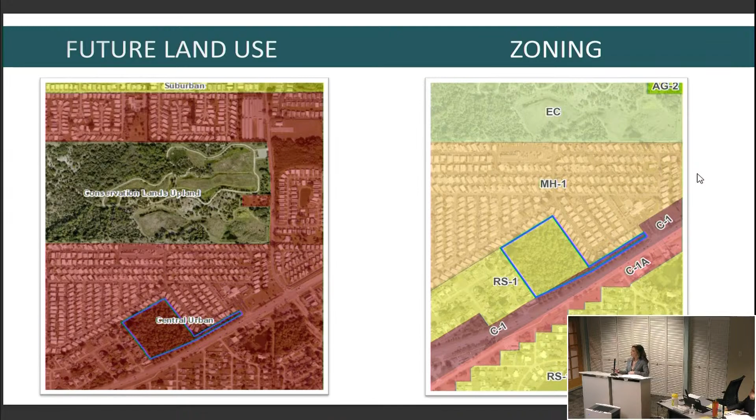From the zoning standpoint, you can see we are largely RS1 zoning. The strip along Bayshore Road that I refer to as the flag lot portion is C1 zoning. Our surrounding zoning districts include RS1, mobile home to the north and east, and then commercial lining the Bayshore Road frontage to our south.

Before we get into the details of the master concept plan, we wanted to set up the context of the site within the future urban area of Lee County, as well as within this dynamic and developing Bayshore Road corridor. So you can see again the property outlined in blue. All lands surrounding us, with the exception of some conservation areas, are within central urban, again areas where the county is looking to direct and accommodate new growth.

Then as you step east towards the interstate, you still have suburban future land use, which allows for densities of up to 6 units per acre. So this is not an area intended for low density forms of development, and actually quite the opposite for the future land use.

Along those lines, this corridor is again progressing through the development process. You can see many properties that front State Road 78 are within existing approved plan developments, some of them very large scale as you approach the interstate. This is indicative of the level of existing development approvals along the corridor and the appropriateness for this site to be converted from vacant underutilized lands to an infill multifamily project to accommodate a variety of housing types in this area.

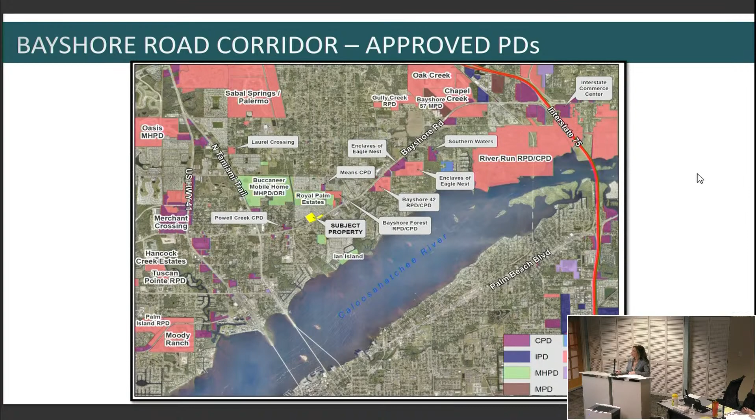Getting into the details of our proposed residential plan development, as Neil noted, we are seeking a maximum of 180 multifamily dwelling units. We are allowed 10 units per acre by right, or by standard base density range within central urban, which gets us to about 91 units, and then we're proposing 89 additional units via bonus density.

To get to that level of density, we have to utilize the Greater Pine Island TDU program, which was created by Lee County to incentivize this. This is the highest bonus density you can get because they're really looking to conserve the rural coastal areas subject to flooding in the coastal high hazard area and direct new growth to these inland sites that are well served by infrastructure along evacuation routes, et cetera. So we're fully meeting the intent the county provided for when adopting that program back in 2015.

We have access directly to Bayshore Road, so we're not routing traffic through our lower density neighbors to the north, east, or west, certainly based on those development patterns. We are seeking a 4-story maximum building height as the upper limit that could go on the site. Unlike many multifamily projects I've worked on, and certainly any bonus density project, we are not seeking any deviations from parking. That's a pretty common deviation.

It can be hard to fit when you're trying to fit in that number of units, but this project does fully comply with the multifamily parking and guest parking requirements per the Land Development Code.

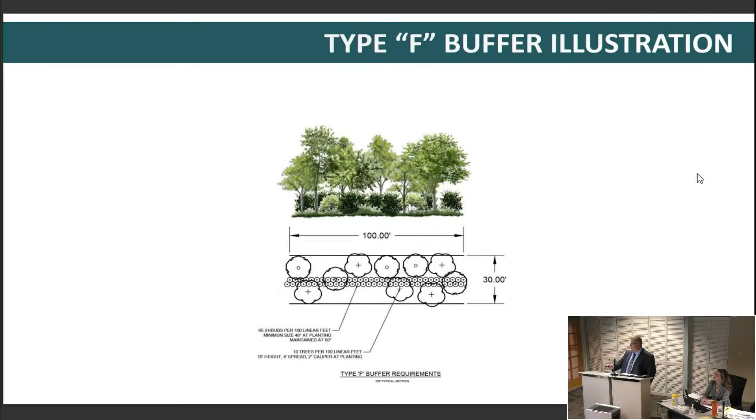And then what does it drop off to? Well, then it goes to a 15-foot type B buffer.

And what about along the west side? Along the west side, it's just a straight type F buffer - 30 feet with 10 trees and 66 large shrubs per 100 feet.

So how is that different from the east side? It is the same, except the east side also has some indigenous vegetation that's going to be preserved. There's no indigenous vegetation on the west side.

And in this example, can you explain the site view for the people on the ground? Sure.

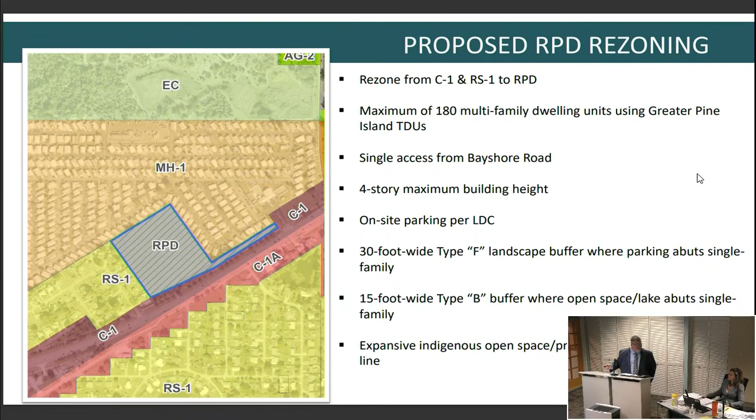Then we have this section - do you want me to talk about deviation 5 with the entry? I can, when I get that exhibit. Did the hearing examiner need more discussion on that wall placement right at the entry road? Whoever is the best person to speak to that can address it during their presentation time.

So that concludes my presentation of the buffers. Okay, thank you. Just a single family slide - what could be built?

We had one more slide to show you that under the current zoning, single family, we would be able to build a 2-story house within 35 feet of the property line with a pool enclosure and no buffer, because single family to single family does not require a buffer, and there's no open space requirement for single family development. So if we chose to just develop this as currently zoned, this would be the sight line right into the back of the house from the adjacent property.

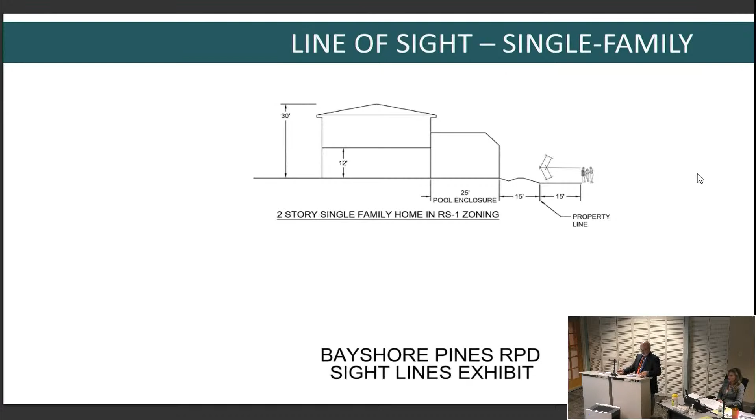But I'd like to continue with the presentation. To pick up a little bit on the entry question that you'd asked earlier, I want to give a little bit of clarification. I don't know if it's in the staff report, but I'm going to hand you the scheduled deviations that we presented in our application, which we prepared on the second page. This will be applicant exhibit 4.

Do you have a slide of this? Unfortunately, we did not put this in our slide. I apologize. Or maybe you can just walk me through it. Yes, I'll walk you through it, I'll point, I guess.

So our entry is located where it is due to spacing requirements on FDOT. This is a 4-lane road with a bidirectional turn lane, so there's no median in the roadway. When we plan entrances, we like to align them so that we don't have any overlapping left turn conflicts. So we've placed this entrance here as it aligns with the opposing road and meets the FDOT spacing requirements. As mentioned previously, we can't have two entrances because we would not meet the FDOT spacing requirements. So aligning it here causes us to have a buffer problem along this little pinch point here at the corner.

So water service for this site is available from Lee County Utilities. There is a water line running along the front of the property. Sanitary sewer service is available from Florida Governmental Utility Authority.

There is a force main on the south side of Bayshore Road, but it's west of the site. We would have to go under Bayshore Road and extend a force main along the south side of Bayshore Road to the west. It's roughly at the location where, I don't know if it's Dodges Creek or Powell Creek bypass, comes under Bayshore Road, just to the west side of the single-family homes adjacent to us.

They do not have sewer in their neighborhood. They have water, but not sewer. We're going to extend the infrastructure to serve the project. To serve this project, it'd just be a force main extension in the right of way. Water you could just tie in, but correct, the water main's right in front of the site, on the south side.

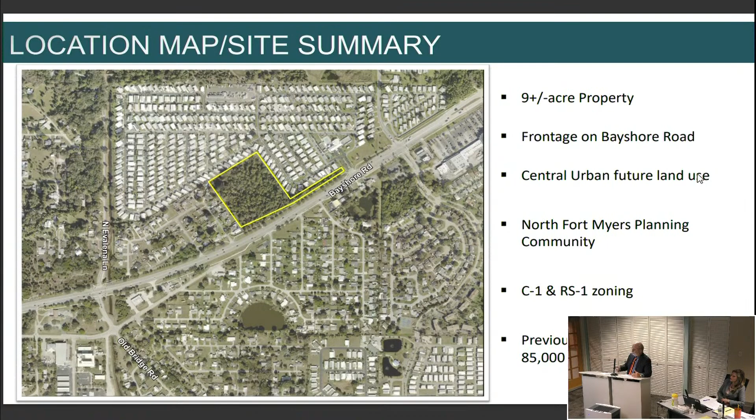So our only outfall—we can't go west to the single family, we can't go north or east into Carriage Village—so we have to come out to the right of way of FDOT. Okay, so stormwater falls on your property? Correct, it stays on our property. Explain, why don't you bring up your site plan, and explain how the stormwater is routed once it hits your property?

So typically—do you have your master concept plan? We have this one right here.

It didn't. So it's going to hit the impervious area, and it'll be collected in stormwater pipes. We do have a little bit of a drainage swale over here that'll bring it around. This swale is intended to provide some water quality pretreatment before we discharge into our pond.

And our pond, the reason we're showing a small pond here, that's about a half-acre pond. It's the minimum size allowed by the water management district. Ponds are good at removing nutrients, certain types of nutrients. Dry pretreatment areas are good at removing other types of nutrients.

This pond will have a pipe that exits out the front of the project. Now none of this is designed yet—it's something that would come in the future as we go through a development order and FDOT permitting process. But there would be a control structure on the lake, and the outfall would come to the right-of-way of Bayshore Road. From what I can tell so far, the drainage goes east, crosses near Hart Road, crosses underneath Bayshore Road, and makes its way to the river.

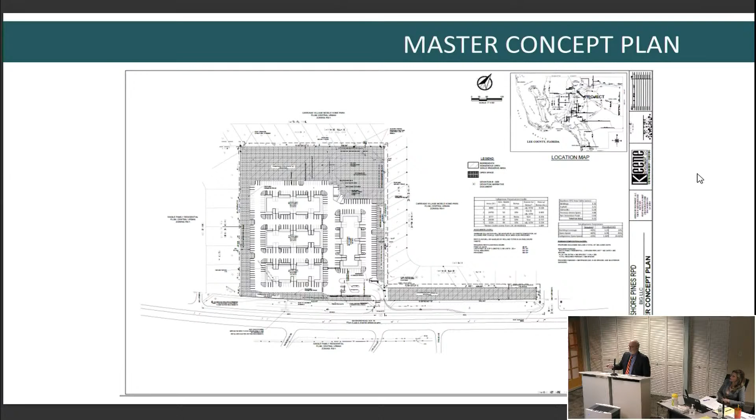Okay, so back to the site. It's going to collect on the impervious areas, directed to the western boundary to a swale, a pipe, a pretreatment system. The water's going to get filtered, making it to the dry retention area, but there's going to be no spillage because there's a berm along the north boundary. That's what I wanted to show—we're illustrating the berm right here, and the buffer would be planted atop the berm.

It helps make the buffer taller. The height of this berm hasn't been decided yet, hasn't been engineered, but typically they're at least 2 feet, could be 3 feet or more depending on how the drainage calculations work out. This is an interceptor drainage swale, sort of the west boundary, and this would take the water north around the indigenous preserve area into the pond.

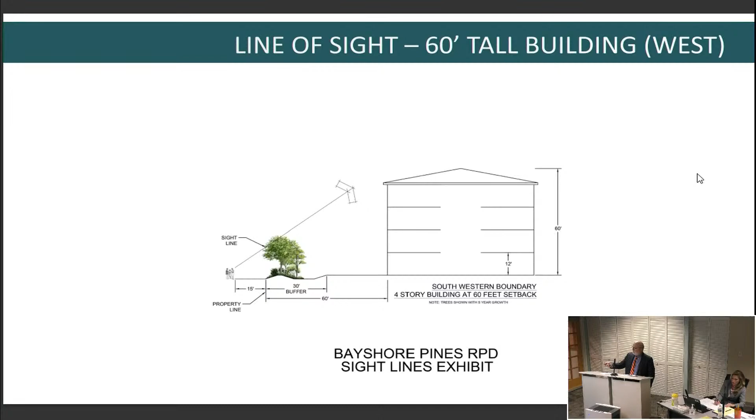This is on this area, the side adjacent to Carriage Village. On the east boundary, where we have an indigenous preserve planned as part of that buffer, this drainage would be brought back into the site. This area here would just stay like it is today. The drainage for all the developed area would be brought back into the site.

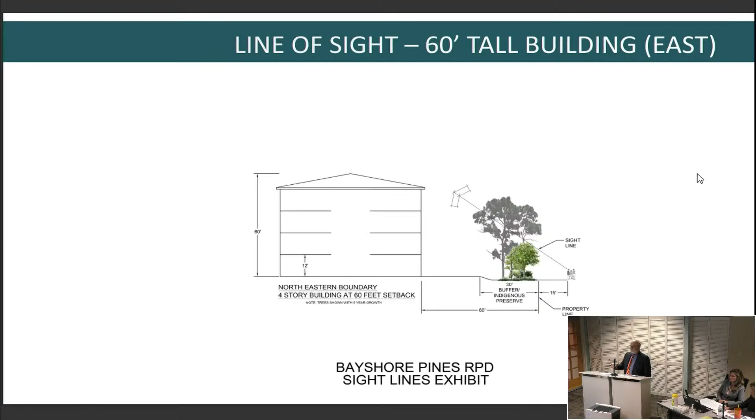Again, we would be getting permits from the Water Management District, FDOT for drainage, FDOT for access, FDOT for utilities, and Lee County Development Order permits—all the standard stuff.

Trying to think if there's anything else I can fill you in on the site design. Part of the site design, and Alexis alluded to this earlier, we've tried to concentrate the buildings in the middle of the site. Part of that also has to do with fire protection, allowing emergency vehicles to get all the way around the buildings through the project. Due to the height of these buildings, it's most likely they would have fire suppression systems built into them because of the height. Usually something over 2 stories typically is sprinklered, and again, because it's multifamily as well.

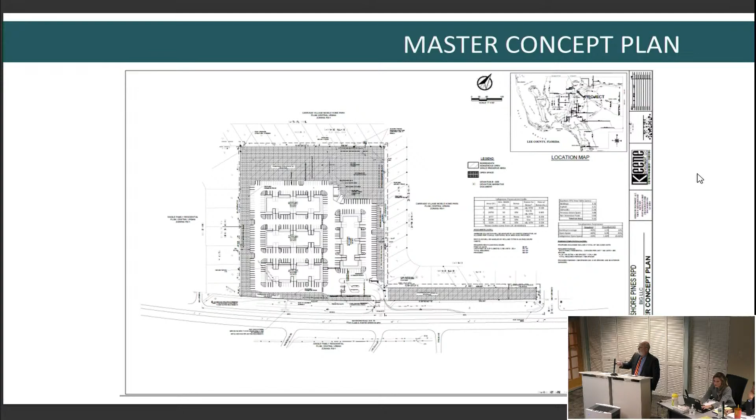I think that's it for my portion at this time.

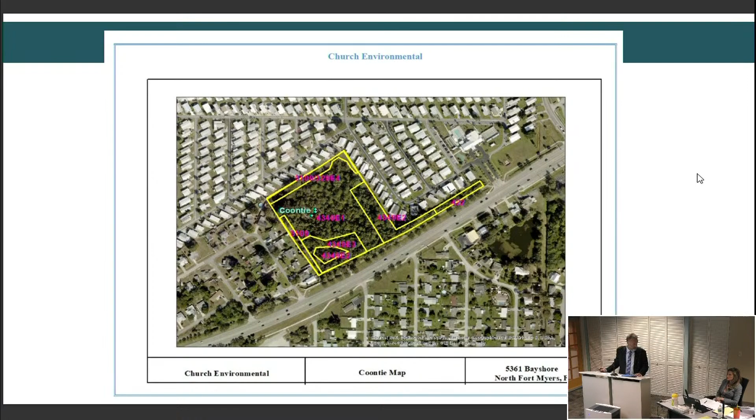Okay, and what's going to happen with the heritage live oak, laurel oak, and pines? Well, they're going to be preserved to the extent practicable. They can be relocated—like we'll probably relocate a lot of the cabbage palms on the property to the extent practicable. And if not, then you offset the taking of that tree with replanting.

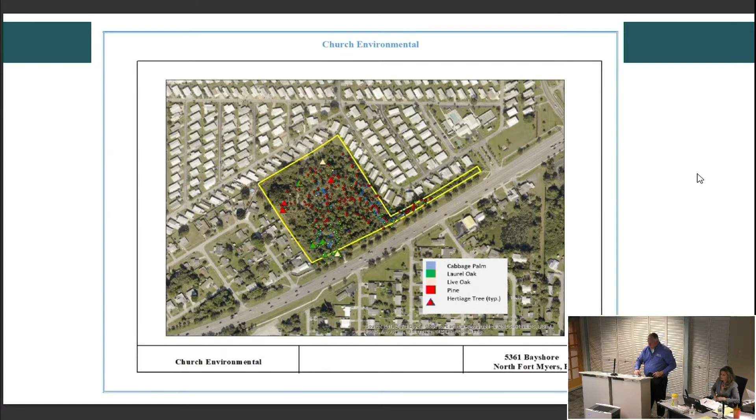Good morning, Ted Treesh with TR Transportation Consultants.

We did the transportation analysis as part of this rezoning application. For the benefit of the public, I'll go into a little more explanation than I typically do for this process. We look at the Institute of Transportation Engineers report, which is a compilation of surveys collected all over the country for this type of land use. For this specific land use, it was a multifamily category, which for this project is a multi-story product.

Typically a multifamily project, as I testified in this forum yesterday, generates less traffic than a single family home, because a single family home typically has more vehicles and more residences and more people living in it than a multifamily use. So a multifamily product generally generates about half the amount of traffic that a single family use generates.

And this is based on surveys that are the source of this published information in this manual? Yes. And you rely on this manual to estimate the trips generated by this project? Yes, and that manual's methodology is accepted and required for us to use by the county, by FDOT, and required by the Administrative Code and the Land Development Code here in Lee County. So these are generally accepted practices here in the state of Florida, Lee County, and all over the country.

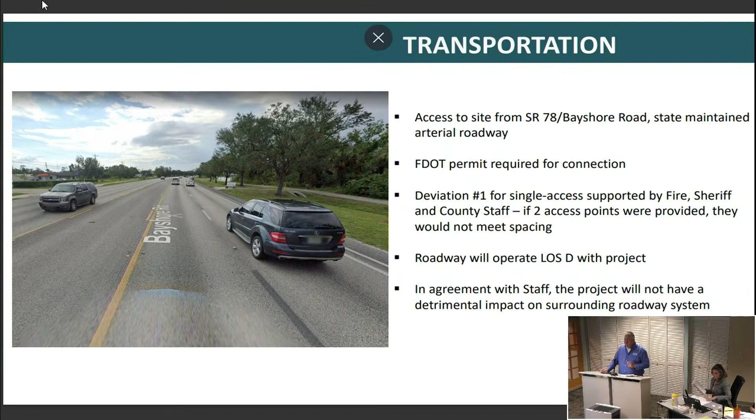Okay, move. I think I have one more. Try now. I have another one? Was that it? Yep, I think that was it. Do you have any other questions for Can me? You advance the slide for them? Yeah, going backwards, it was back. There we go, that was me. That's all for me, unless you had any other questions. Okay, thank you, thank you.

And you'll be here to hear the questions of the public? Yes, I will. Okay.

All right, thank you. And I just want to tell everyone, I think we ran this out of battery yesterday. We had quite a crowd. Maybe.

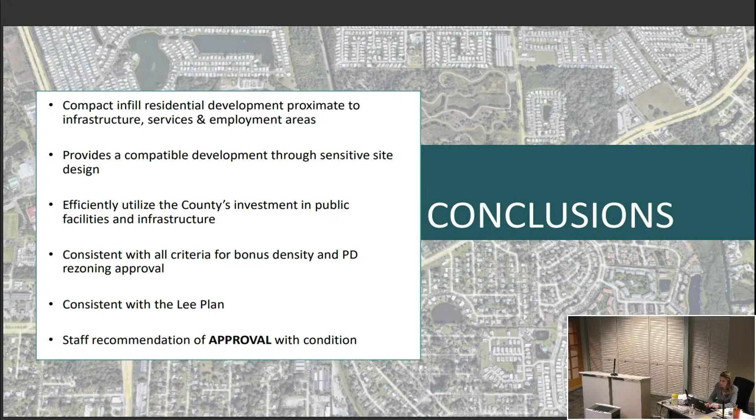Well, oh yeah, I will. I was gonna look—they mentioned Gary, this guy right here. Yeah. Okay, hopefully Sharam says okay. I said, hope Sharam says okay. Come on, Sharam. You guys need me or?

Are you still on the Richland call? Did you hear her questions or no? Probably not. Okay, she was like, have you done an inventory of surrounding building heights? Have you done an inventory of surrounding densities? And I believe we did look at some of that information. I don't know if you can just look through your files. I'm gonna try to do that, and then I might have you look at the PDs near us that are on your exhibit and see if we can get any info easily, quick, because when you use LeeSpInS and you just pull the DRI or the PD layer, you can easily grab the resolution and see the height. So that's another thing. But if you can just look through the files, I gotta get back to my now, but she's—we're getting ready to begin.

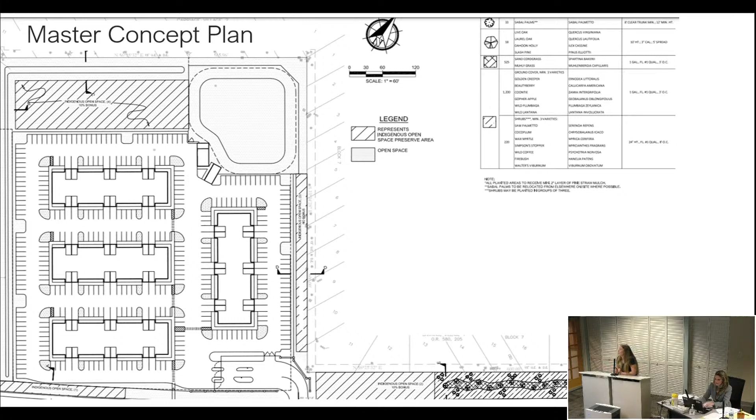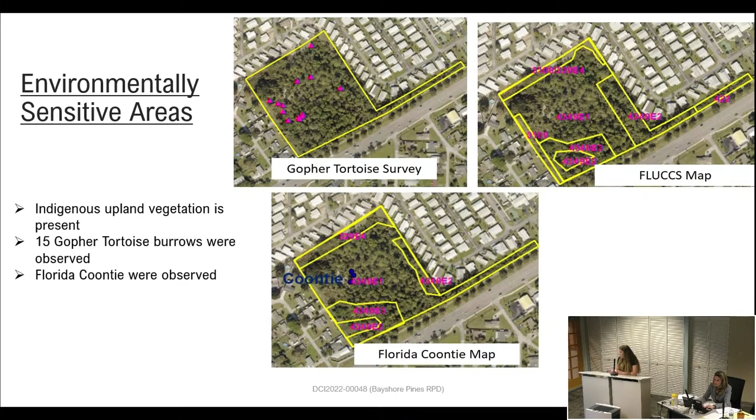Now, they do have environmentally sensitive areas on site, but they have agreed to tortoise relocations per FWC regulations. They do have an up-to-date FLUCCS map, and with that FLUCCS map, the indigenous areas are classified by 10-701 indigenous. They also have a Florida Coontie map, which they have provided a relocation plan for.

Now, for multifamily residential developments, they are required to provide 40% open space. The applicant is actually providing 45%, which is 4.09 acres. The code requires half of the required open space as indigenous. They have requested a deviation for it. 1.83 acres, or 20%, is required. The applicant is utilizing credits and providing 1.76 acres, which is 19%. So they're pretty close to their indigenous open space requirement, and I have provided a breakdown here with the credits.

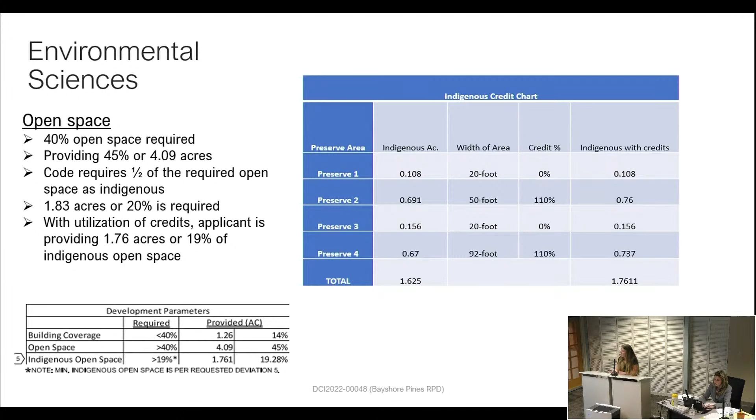The environmental science landscaping is as follows. The north is required to provide a 15-foot type B. The south is required to provide a 15-foot type B, but with the overlay they are actually providing a 20-foot type D as conditioned. The east is required to provide a 15-foot type B, sorry, and they are providing a 30-foot type F where roads and parking are within 125 feet, which follows code requirements. To the west, they are also providing the 15-foot type B requirement as a 30-foot type F, where the 125-foot rule comes into play.

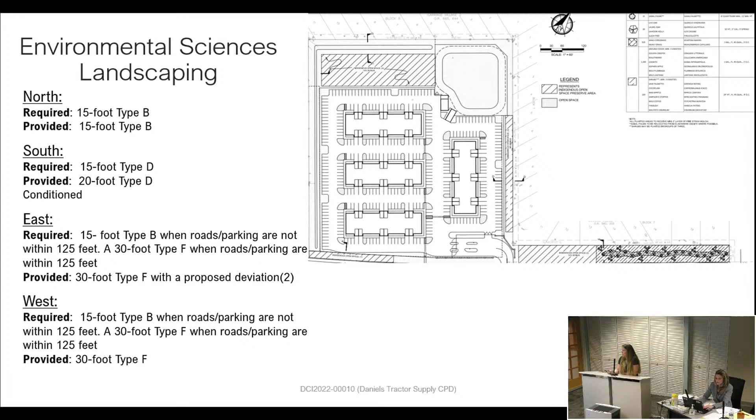The only area that they are requesting a deviation for is that FDOT area, which I have blown up here on the PowerPoint. Although they're not able to meet the minimum landscaping for that area per code, staff has proposed a condition to maintain shrub height at 72 inches instead of the normal 60. This will provide some screening to the residents and follow the 5.1.5 policy in the Lee plan.

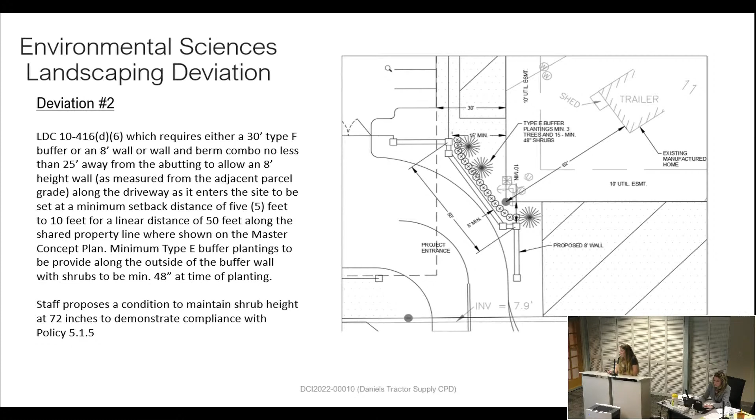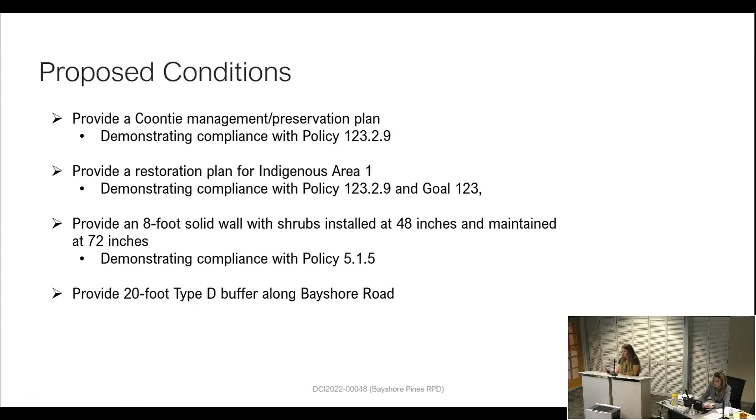The proposed conditions are as follows: provide a Coontie management plan at time of development services; provide a restoration plan for Indigenous Area 1, which they have agreed to; provide an 8-foot solid wall with shrubs installed at 48 inches and maintained at 72 inches, in demonstration of policy 5.1.5; and provide a 20-foot type D buffer along Bayshore Road. Even though that's already required, we're installing it as a condition so no further changes can occur. That's all I have to add to that presentation.

Thank you. Do you have an extra copy of that PowerPoint so that I have an exhibit? No, but I can get it to you. Okay, please do.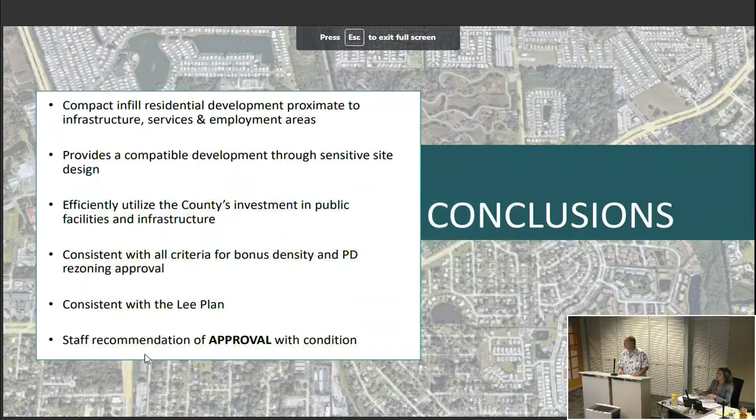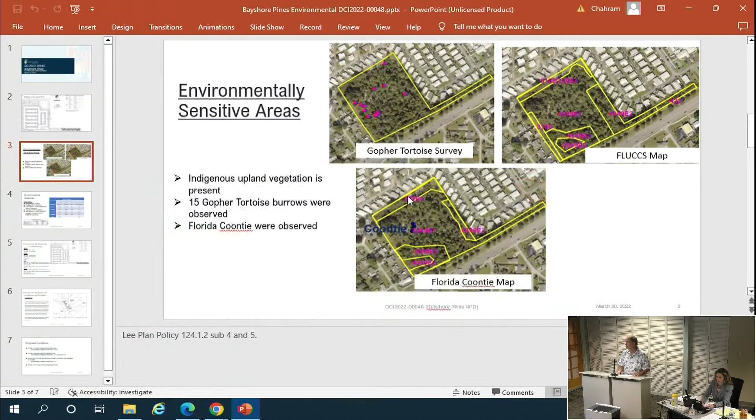Where we're coming into this development, making a left turn to be stacked up there — one thing on developments I have done before, especially building a multi-story unit like this, we always had to go to our local fire department for the length of our ladder trucks and what would be able to get into the development. I can assure you, at this plan, a ladder truck would have a difficult time servicing a fire on a 4-story building. That has to be addressed.

One thing that wasn't discussed was on a new development here in Lee County, the elevation of the property where they're going to construct a new building. That elevation for our flood zones is going to be raised. So instead of being 60 foot, it could be 65 or 68. We have yet to know what the elevation change on this property would be.

And when you're talking about not messing the berm up with the growth that's there in the trees, that will impact the future growth of these indigenous products that are there. So we would need to know how much that elevation will be changed before they started construction, to give you what you were asking about height, and the concern the board had about the overall height of a new 4-story structure.

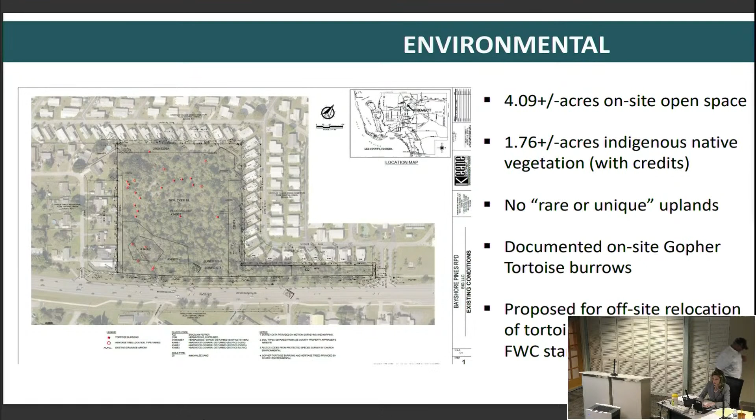My concern will be the crime increasing in our area with that many units going in. And I'm concerned, like everybody else is, about the traffic and everything overflowing when there's that much more put in there. Also, the pond will create more mosquitoes, and will that be taken care of? And that's all I have.

I'm sorry, thank you, what will the pond create? Mosquitoes. Oh, mosquitoes. Next name is just Birdie.

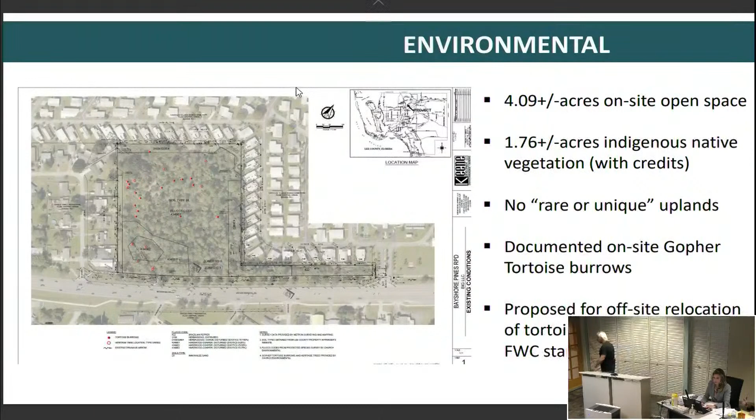I want to make a few comments before we conclude the hearing for today, directed at staff and the applicant. Additional information I would like presented when we close public input and go back to you.

I would like a detailed explanation of what the site elevation is now and how much fill would be brought in. And where is the height of this 60-foot building going to be measured from, existing grade or as filled as necessary to comply with flood regulations?

I would like to know whether this is going to be an age-restricted community, and if not, where on the site plan you are accommodating a school bus drop-off and pickup.

I would like, as I requested before, an analysis of the density of surrounding development, both north and south of Bayshore Road. Also, regardless of whether it's age restricted or not, I want to revisit the subject of an amenity area, particularly if it's not going to be age restricted.

I just want more information on the design of the site and how we are accommodating the bus stop and potential amenity area for children that may be living there. And let me just check my other notes for a moment, if you can bear with me.